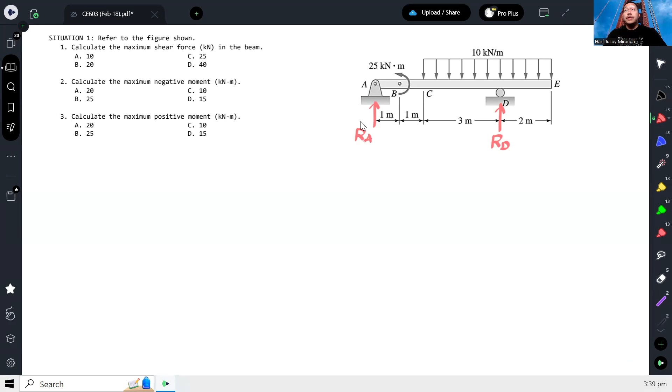All right, so let's take summation of moment. Let me calculate RD. So summation of moment tayo sa A. Okay, assuming counterclockwise positive, we will have, let's start with 25. So 25 is already counterclockwise. And then yung distributed load nito, yung equivalent load nito, no? Which is 10 times yung haba nito, which is 3 plus 2 or 5. So that is 10 times 5.

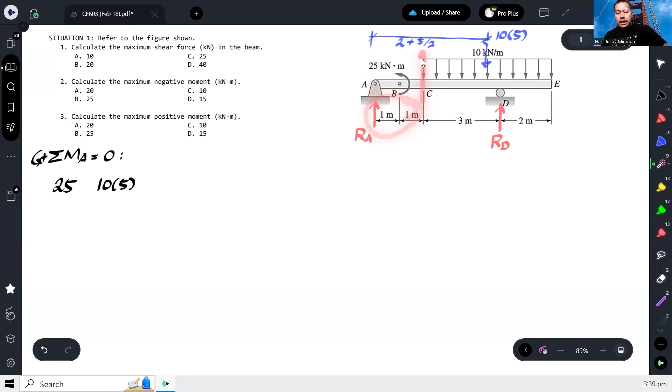And then the moment arm from A, yung distance na to, would be 1 plus 1, 2, and then plus half ng 5, no? So 2 plus half ng 5. Okay, kasi 'di ba ito ay mula dito, ito ay 2, and then mula dito hanggang dito is kalahati lang ng length na to, which is 5. So that would be 2 plus 5 over 2. Okay, ang rotation niya clockwise, so that's negative. And then the assumed direction of RD is upward, so magiging rotation niya is counterclockwise. Ang moment arm is 5. Okay, so that will be all equal to 0. So therefore, the reaction at D would be equal to 40.

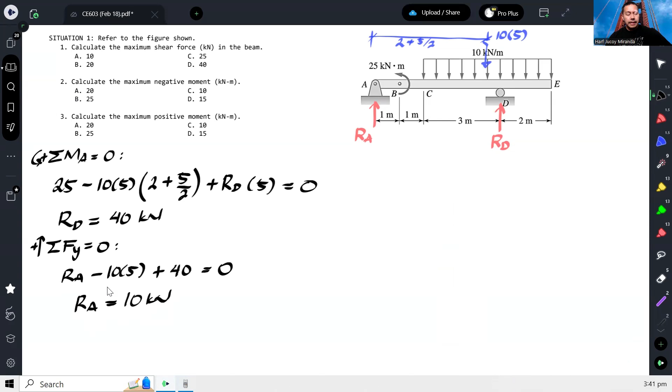Okay? So to calculate naman yung reaction sa A, let's just take summation of forces Y is equal to 0. Assuming upward positive, so we have RA minus 10 times 5 and then plus RD. So RA would be equal to, 50 minus 40, so 10 kilonewton. So positive, so ibig sabihin tama na upward siya. Okay, so ibig sabihin ito ay 10, ito ay 40. So pwede natin i-drawing yung shear diagram.

Okay? So we have here 10 kilonewton concentrated, no? So nandito kunwari yun. Tapos wala tayong force from here to here, so constant lang yun. Tapos meron tayo ditong distributed load. So from 10 na positive kasi upward, mabawas tayo ng 10 times 3. Hanggang dito lang muna sa D, no? 10 times 3. So that's gonna give us negative 20. So ibig sabihin, from here, pupunta tayo ng negative 20. Ayan. So dahil uniform naman ito, straight line lang ito or 1 degree lang ito. And then meron dito concentrated na 40 upward. So magiging negative 20 plus 40, that's positive 20.

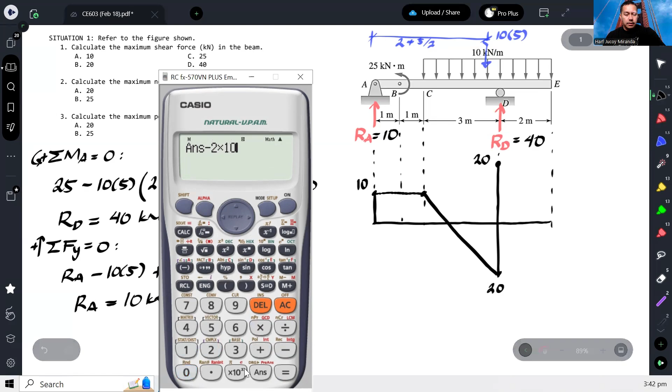Okay? And then another uniformly distributed load. So plus 40, naging positive 20 siya. Tapos minus naman itong load na to, which is 2 times 10. So that should give us 0. Ayan. Okay? So actually, sa shear diagram, masasagot na natin kung ano yung maximum shear force. And that gives us yung 20.

No? So, guys, kapag ang tanong lang, what is the maximum shear force? Walang in-specify kung positive or negative. Automatic yun. Pipiliin natin yung pinakamalaking absolute value. So, halimbawa lang, ito ay negative 30. So, ang maximum shear force natin is 30 kilonewton. Okay, dito kasi nagkataon na same lang sila, kaya yun yung sagot natin, no? 20.

Okay, next, calculate the maximum negative moment. So, pinapakompute naman what is the maximum negative moment. Alright, so pwede nating i-drawing yung moment diagram using area method. So, di ba, area nito will be the magnitude for the moment diagram, no? However, before we can proceed, kunin muna natin tong distance na to. Okay, so kung yan ay x, yung kabila would be, ano ba tong length nito? So, as you can see from the figure, that's 3, no? So, this will be 3 minus x.

So, by ratio and proportion, we can solve for x. We have x over 10 is equal to, yung kabila, 3 minus x over 20. So, we can calculate x to be, I believe that's 1, no? So, check na lang natin.

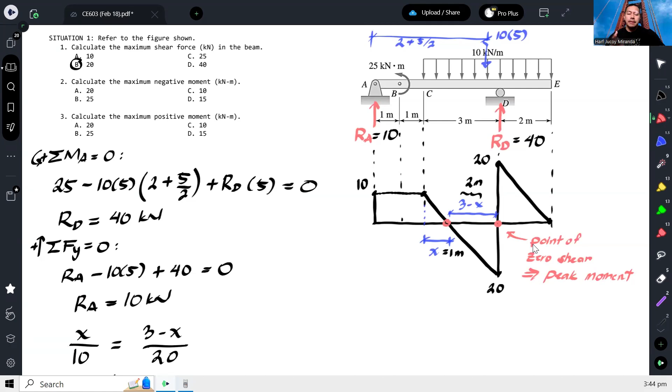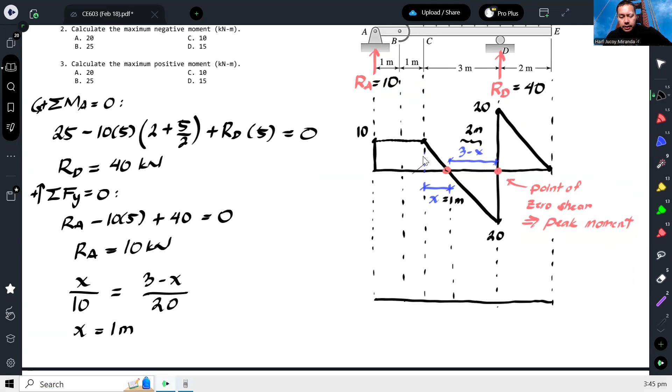Anyway, to proceed with this, so let's start drawing the bending moment diagram. Okay, so by the way guys, I'll just highlight the shear diagram. Okay, so for the moment diagram, starting with, here we can calculate this area para makuha natin yung moment supposedly from here to here.

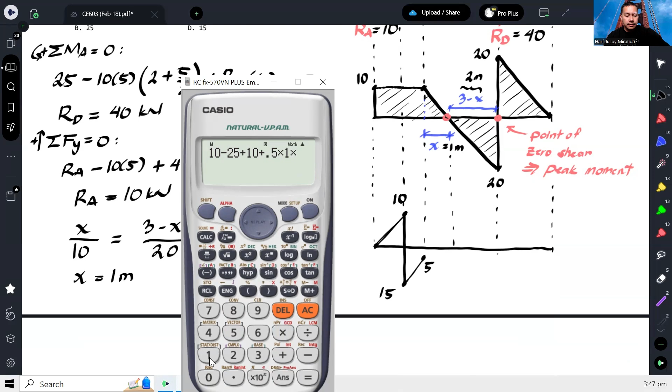So now, we have to understand how we would connect these two. So as you can see, this is a first degree curve. First degree yan. So, ibig sabihin dito, second degree na dapat. Second. So, dalawa yan. Pwedeng pa ganito, pwedeng pa ganito. I mean, this curvature or this curvature.

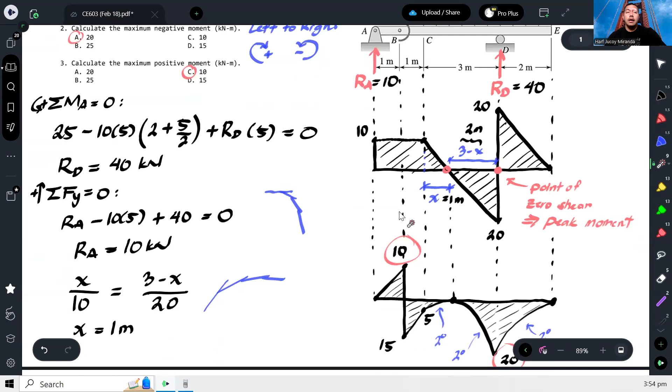Okay? Tapos highlight lang natin that this is a second degree curve. Ito rin. Ito rin. Although hindi naman talaga necessary na i-drawing yung moment diagram, it's just that it's easier for us to identify yung mga positive and negative moment if we would draw the moment diagram. Okay, so that's how we solve this problem.